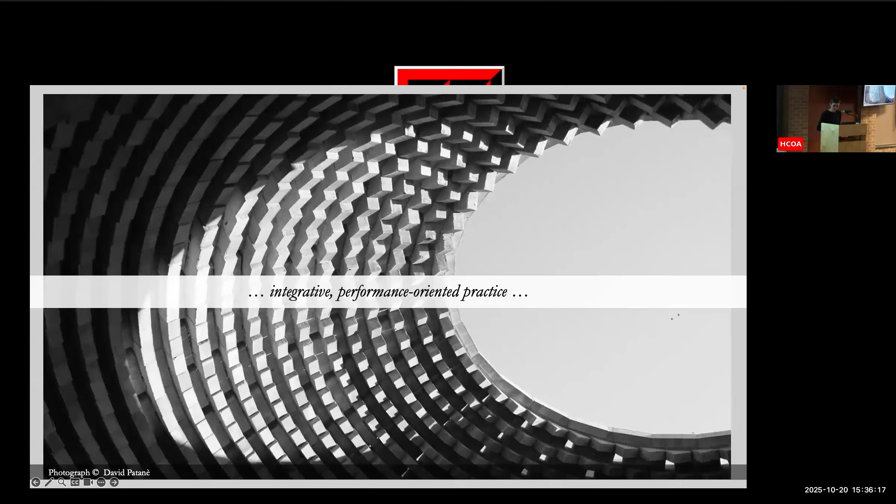So before I talk about my current research, I'd like to provide a little bit of context, say a couple of words about my earlier work and just my interest in general. So as you just heard, my creative work as part of a small architectural studio based in Sicily, Italy, was really strongly shaped by my experience as a student at the Architectural Association in London. Aion, my studio, embraced a performance-oriented approach to design, and we really treated natural dynamics as both inspiration and a key driver of decision-making in architectural design. I co-directed the practice with Andrea Di Stefano until 2013, when I moved to the US to pursue a Doctor of Design degree at the GSD.

So to give you a sense of what I was engaged in before moving to the US, I'll just very briefly mention a couple of projects. I Ramarri was a project for 5 single-family houses located on the coast of Sicily. In Italian, ramarro refers to the European green lizard. In this project, we focused on integrating the architecture with the natural landscape, and the site for this project overlooks a vast agrarian terrain protected for its environmental value, and it's also framed by the mountains on one side and the Mediterranean Sea, so it was a spectacular site.

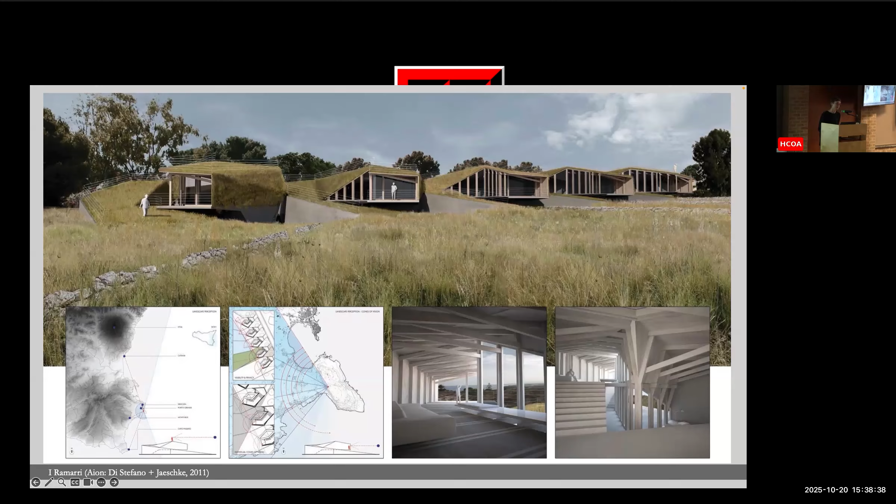In the project, we sought to give each of these houses the best possible view, while at the same time minimizing its visibility from around and also maximizing the vegetated surfaces. So the Mediterranean maquis, which is really like the chaparral, sustained by collected rainwater, was intended to envelop the dwellings with local shrubs and aromatic plants. The green roofs were designed to protect the houses and accommodate outdoor activities, further extending the habitat. The project, unfortunately, remained unbuilt due to a change in land use regulations. That's probably where my interest in building regulations started.

Lost Highway, another design that remained on paper, this time due to the global financial crisis of 2008, another reason for my doctoral research, was a project for a private house, again in Sicily. The building was conceived as a very simple rectangular volume, really a bundle of beams, with an interior courtyard meant to interconnect two independent and flexible living spaces.

So it provided us with an opportunity to explore an integrative process that took advantage of the redundancy that is inherent in glulam and any kind of heavy timber construction. The wall thickness was determined, of course, by thermal requirements, which then in turn generated structural redundancy. And so this allowed us to experiment with integrating other factors such as visibility, illumination, natural ventilation by really subtracting rather than adding parts or layers to the building.

We experimented with a randomly generated pattern of openings controlled only really by the desired degree of porosity. And this quite heavily rule-based design approach was in this case combined with a chance-driven process, a combination that I think produced some interesting unexpected results and a distinctive aesthetic.

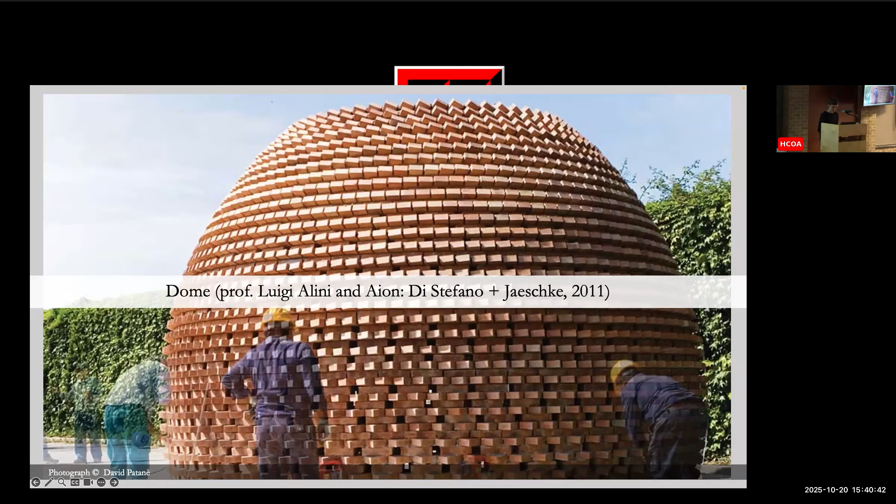And so in this project here, you see this compass. We took this traditional manually operated tool that is used for laying bricks, and we gave it another level of sophistication. We made the arm not only extendable, but we also added a mobile brick holder that let each brick rotate around its axis. And so this simple modification gave the tool enough flexibility to actually produce a range of dome geometries and surface effects. And that brought the method very close to what's possible with digital tools today.

What's exciting is that this also opened up the potential for countless domes and dome variations to be actually built using the same device that could be reused. And the compass also helped us work within local economic and technological constraints, since, of course, acquiring a robot at that time and in Sicily was neither feasible nor really desirable. And so without losing the richness and complexity associated with digital design, we were able to achieve similar effects.

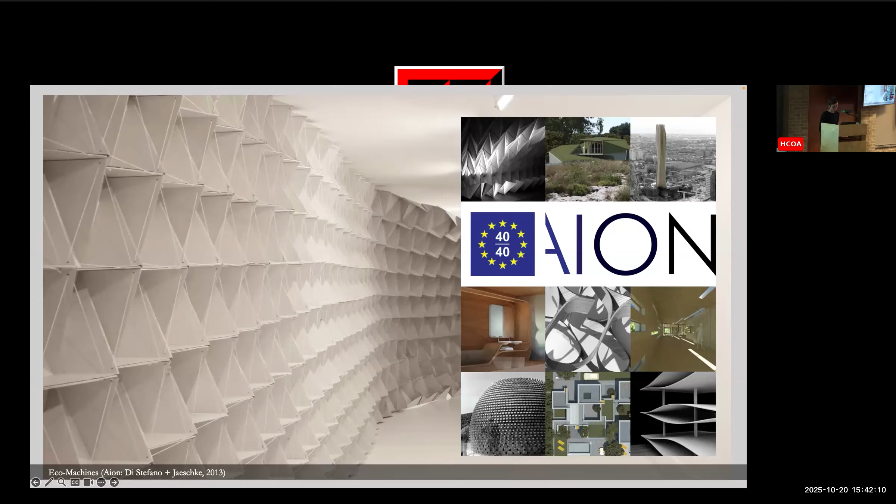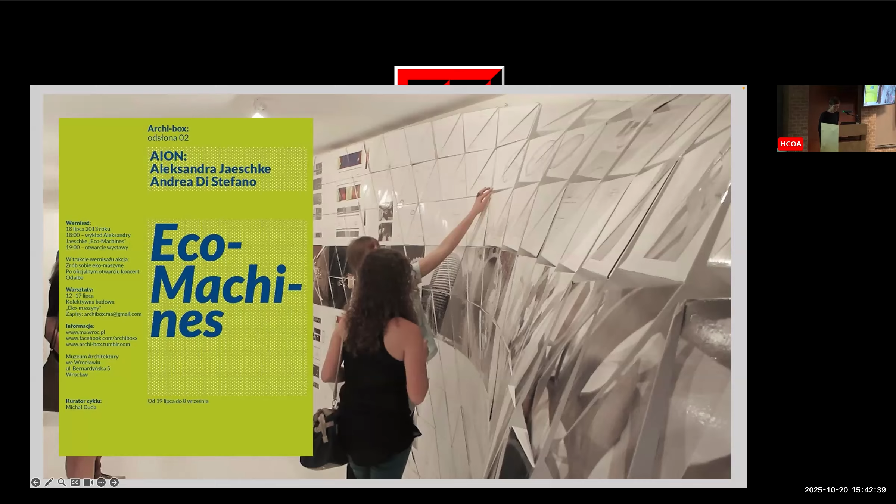In 2011, in recognition of the work that we developed, my partner and I received this award from the European Union. And then it was really an exciting time, although admittedly really stressful also because of all these legal and economic challenges, but in 2013, we had the privilege of presenting the solo exhibition in Wrocław, which is actually one of the very few museums of architecture in the world. And shortly afterwards, I moved to the United States to really reflect on those years and devote myself to research.

So my interest in sustainability originated really in that early creative work, even though the term itself was not really part of my vocabulary at that time. Despite my commitment to the natural environment, I always found myself struggling with how narrowly sustainability was defined within architecture, gradually really recognizing its failure to convey the true hierarchies of importance among our spatial, energetic, and material choices and impacts. And this realization triggered my interest in systems theory, particularly its applications in ecological studies. And over time, I began to really embrace ecology as a framework for architectural discourse.

And so, as my understanding of our place within the biosphere became more and more holistic, I also came to see the need to pay equal attention to what we do and how we think about it, to our actions, but also to the mindsets from which they arise. And so up to now, my work has mainly focused on questioning the validity of the frameworks we use in architecture and on emphasizing the importance of drawing from other domains of knowledge, of expanding our systems boundaries, and rethinking the mindsets that tend to favor certain modes of inquiry over others. At the same time, I've been constantly deepening my understanding of and appreciation for the relationships that connect humans and plants.

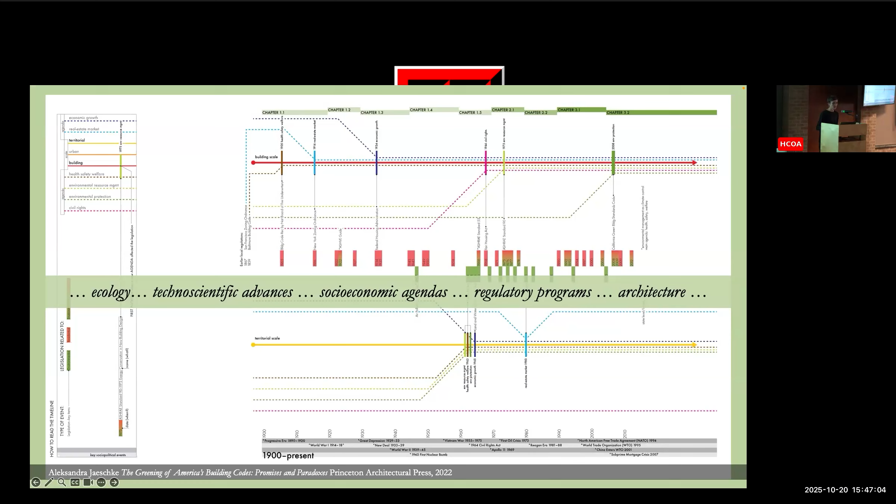healthy, and sustainable. And so what I found was that the cultural, socioeconomic, and political forces that shaped those early building codes and financial instruments actually still influence today's regulations and incentives. In other words, those same forces continue to determine how we build, how we measure environmental impact, and ultimately how we define sustainability itself today.

The book, based on my dissertation and entitled The Greening of America's Building Codes, was published in '22. And in the book, I, of course, examined the origins of the narrowly defined frameworks and mindsets from which all these ideas, sustainability, green building standards emerge. But at the same time, the book tries to reflect on, through a series of interviews, how we might expand the boundaries of our practice to actually try to catalyze some meaningful change.

And so I highlight a range of successful, what I call pre-design efforts, including things like the development of new model building codes and standards, technologies and products, and software tools, but also financial mechanisms. And among others, I spoke with the American architect Martin Hammer about his work on the development of model building codes for traditional construction systems, such as straw bale, and more on that later. And I also spoke with the German geographer Michael Bruse, who developed the environmental simulation software called ENVI-met, which many of you probably know and use today.

So my struggle with the narrowly defined term sustainability also had to do with how we define the spatial temporal system boundaries. So think about this. A relative increase in energy efficiency, for example, might turn out completely insignificant if one considers other scales of investigation. Yet we often draw the boundaries of our, that is, architectural systems too tightly to be able to even see it.

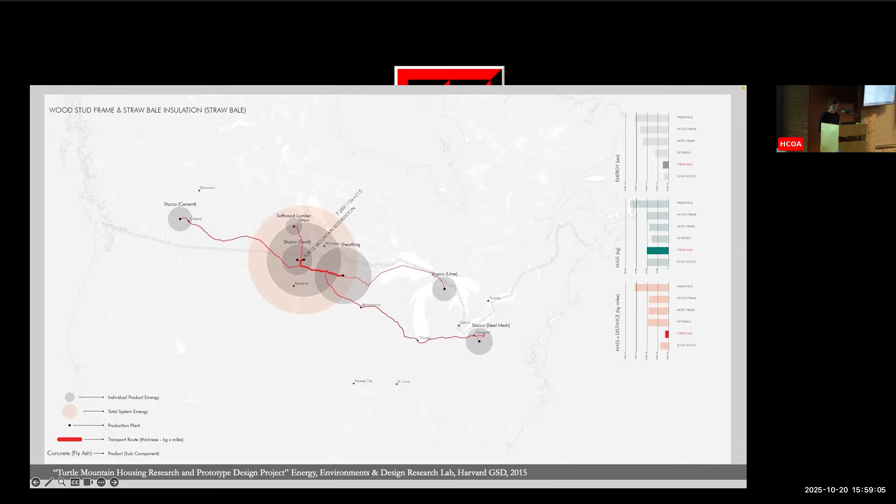We rarely do that in our field. And we often see negative carbon emissions reported for these kinds of materials since they absorb carbon as they grow. In other words, we get credit for work we humans did not actually do. But more on that in a moment.

But as our investigations over the last decades, years, into the environmental impact of buildings have expanded, or we could even say shifted, from an early focus on the operational stage to a full cradle to grave perspective, and now with even more focus on the raw material supply chain and then the end of life of materials, of course, as well, which is not at the moment the topic of my talk today, we've started to look at a much bigger picture. And I like to use the framework of the 9 planetary boundaries to think about this broad and at times rather bleak picture.

This framework was developed and is continuously being updated by the Stockholm Resilience Center. It identifies 9 key planetary systems that together indicate the overall health of our planet. By the way, there's a phenomenal documentary about this. I really recommend it. Its title is Breaking Boundaries.

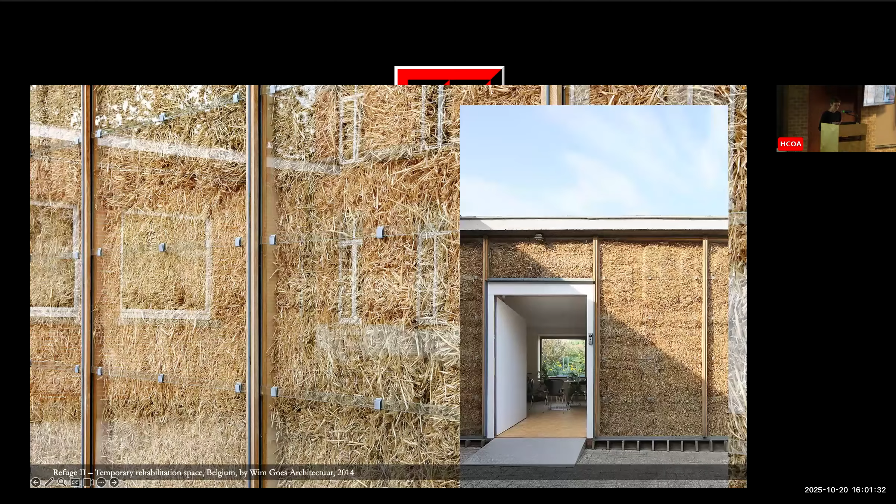So all these visual tools and methods we use help us talk about environmental impact, and we can definitely do even more on that, but I think we've been already paying a lot of attention to it and using these tools in quite successful ways.

But at the same time, buildings themselves convey environmental messages in very different ways. And there's a long history of environmentally conscious design that not only tries to reduce a building's impact, but also uses architecture as a form of communication, as a way to express environmental values. And we could say, in other words, that buildings also function as environmental media.

But whether these two objectives, the actual performance and the message being communicated, truly align, I think is often debatable. Sometimes, and most of the time really unintentionally, architects project messages that are only true in relation to maybe more harmful alternatives or within narrowly defined system boundaries. And so these messages may be based on practices that were considered environmentally friendly in a different context or at a different time. But once broadcast, these messages tend to perpetuate themselves.

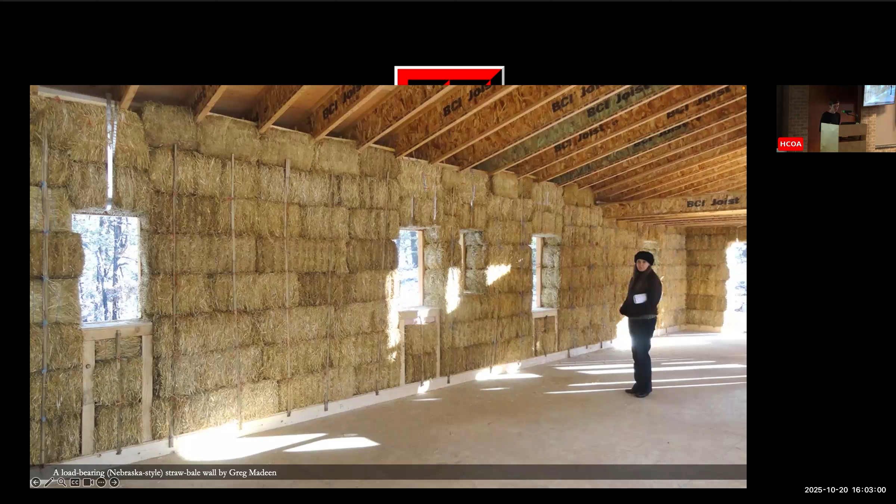So let's take a closer look at straw, since it's often held up as an example of healthy and environmentally responsible construction, and I still think rightly so for many, many reasons. In the United States, the practice of building with straw began to take shape in the late 19th and early 20th century, especially in Nebraska, where settlers in the Sandhills used straw to build their homes. By the way, the most famous example, I think, is the Pilgrim Holiness Church in Nebraska that is almost a century old.

Now, my own engagement with straw began when I was a doctoral student, so that's a while ago, at the Harvard Graduate School of Design, where I led a project to help an indigenous community in North Dakota develop a new housing prototype. So as part of the preliminary research, we evaluated 6 different construction assemblies and ultimately chose non-load-bearing straw bale construction.

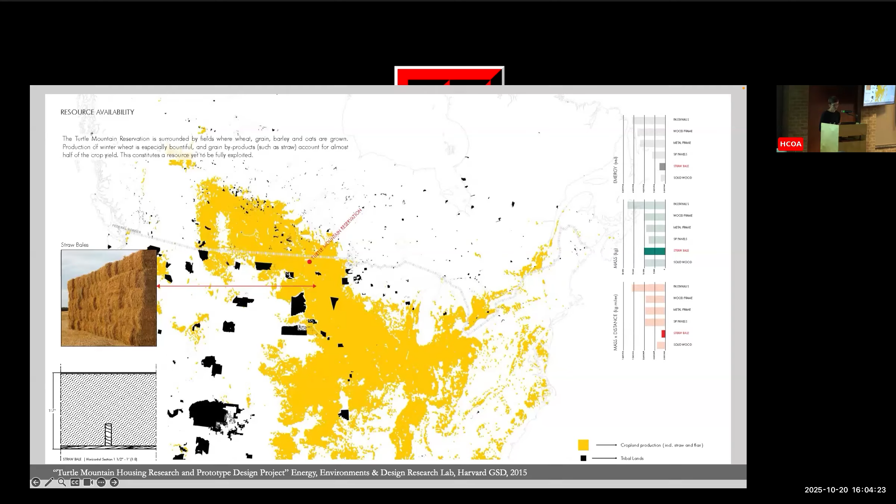Now, despite its many advantages, low embodied energy, local availability, and the community's prior experience with this construction technique, implementation was challenging, and it was hindered by the lack of logistical infrastructure, but really mainly by cultural misconceptions about straw as a building material. So let me give you a really quick overview of this project.

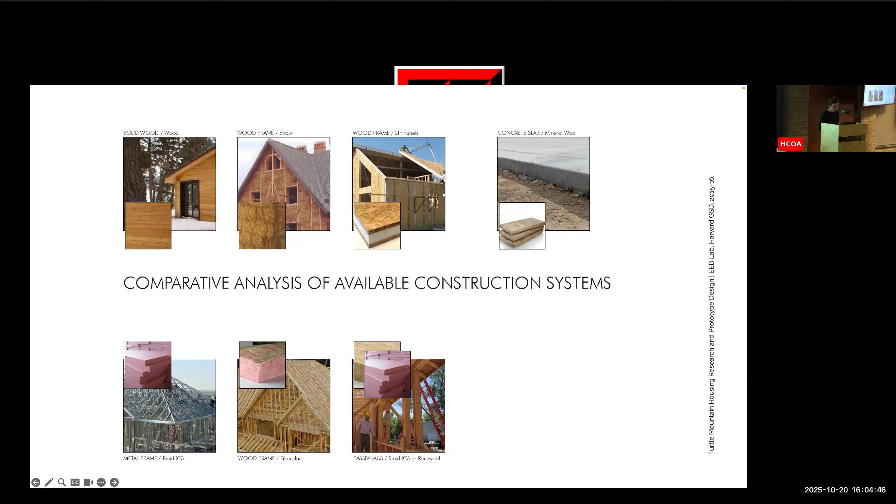So to propose a solution, we began by analyzing 6 common wall systems and 1 typical foundation, since there isn't really that much to choose from, so we could compare their performance and environmental impact. We modeled and analyzed each of these systems to see how they performed in 3 key areas.

Overall mass, which of course matters when assessing the impact of transportation; emergy, a more inclusive way of thinking about embodied energy that was developed for ecosystem accounting in systems-based ecology by Howard Odum again. And we also looked at heating loads to understand the energy required during the operational phase.

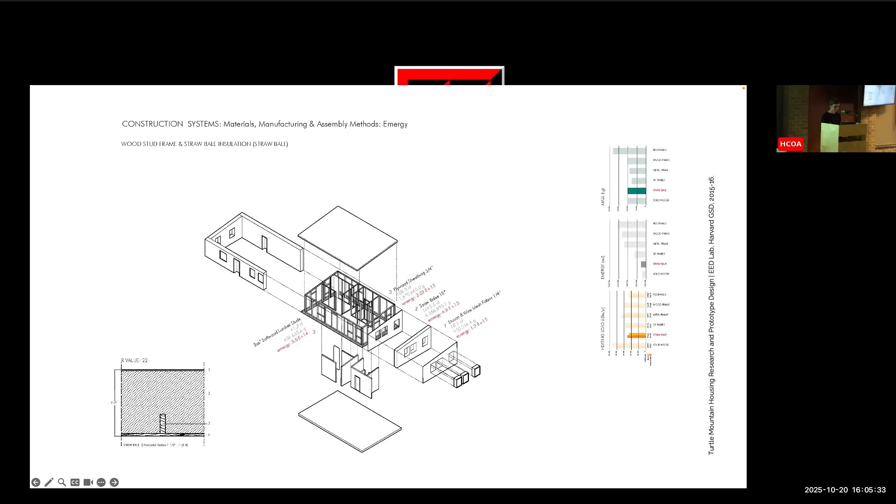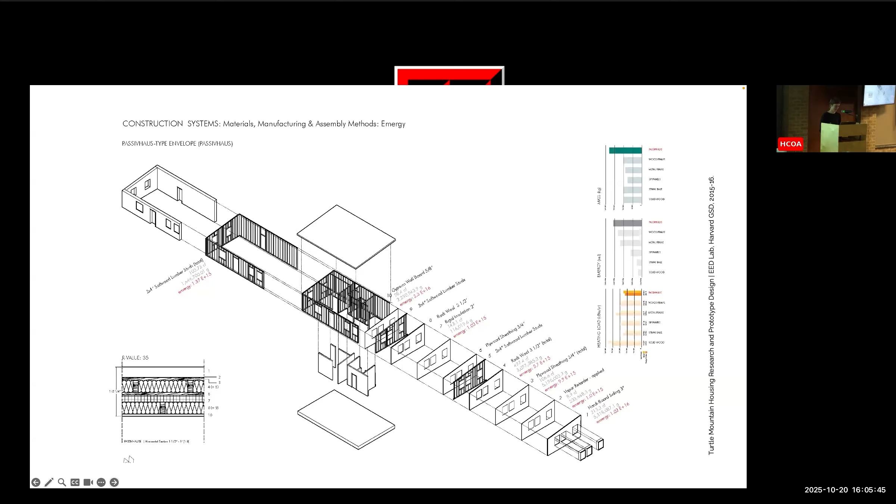So here you see an exploded diagram of a solid wood system and the diagrams of its scores. And going through the different materials, this is a straw bale, non-load bearing straw bale construction, SIP panels, light gauge steel frame with rigid insulation, wood frame with batt insulation, and then passive house. Of course, even just visually, we see how things start to expand.

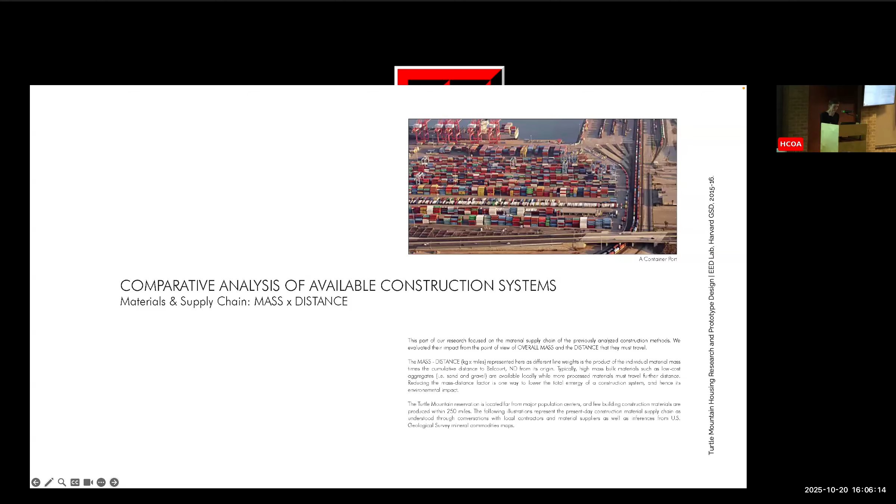We then looked at the supply chain and evaluated how the mass of each material relates to a distance it needs to travel to actually reach the site. And this helped us assess the embodied impact of transportation, not only in terms of energy use and carbon emissions, but also just simply to acknowledge, even if not being able to quantify it, the hard to measure effects on road infrastructure and ultimately on land systems.

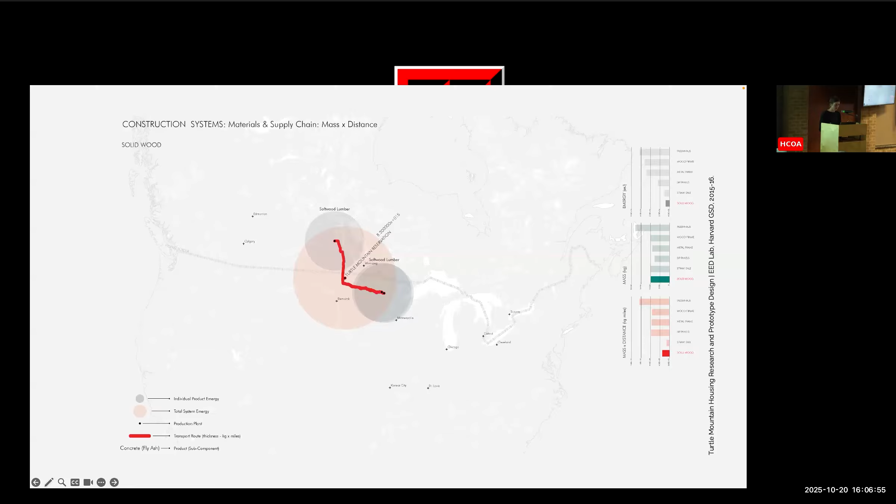So in these map-based diagrams, you can see each system analyzed in terms of the distance its materials would need to travel from the first supplier that we were able to find. And the thickness of each line represents the mass distance impact, and the gray circles show the embodied energy for each material, and the orange one shows the cumulative impact for the entire system. So again, it's comparing the same systems, solid wood, straw bale construction, SIP panels, light gauge steel frame with rigid insulation, wood frame with batt insulation, and passive house.

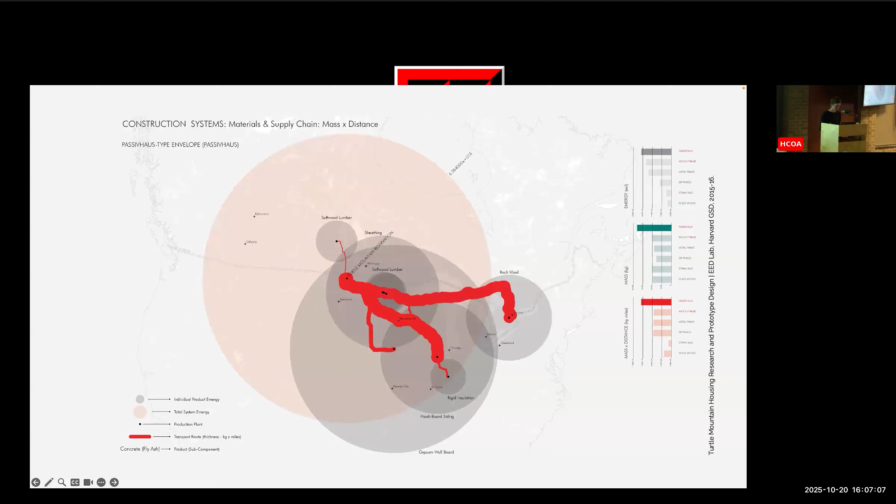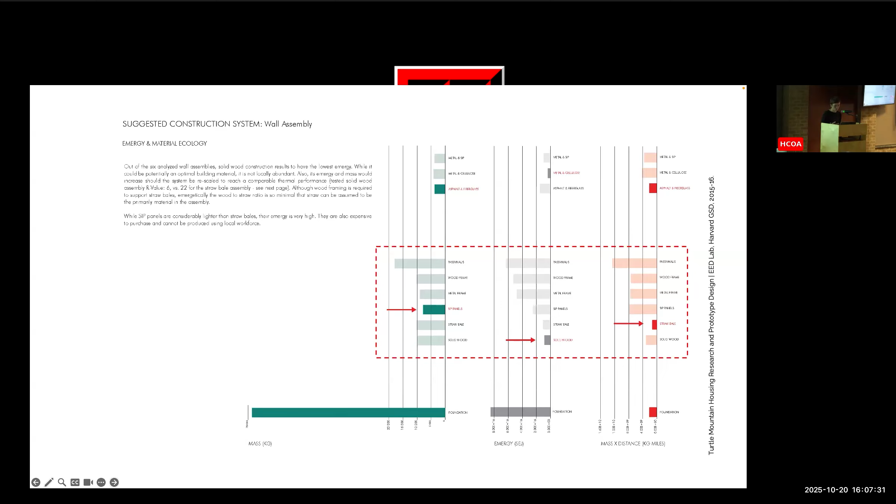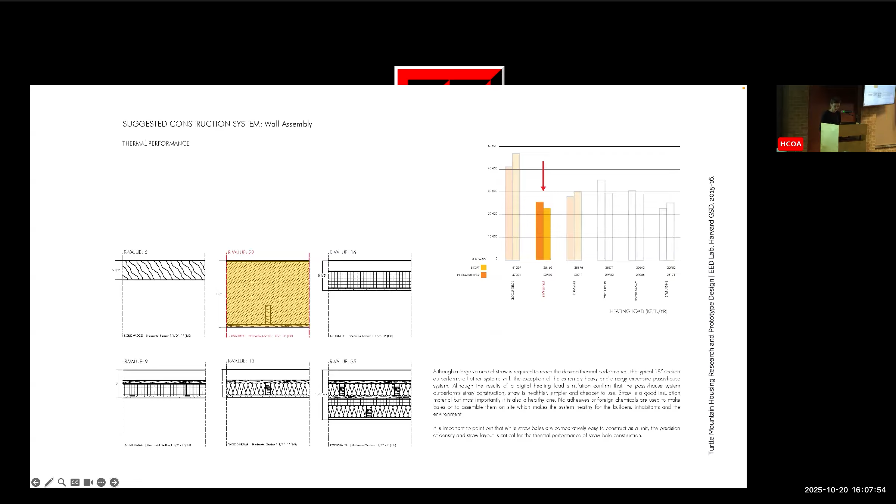Now, these 2 types of analysis helped us narrow down the options. There wasn't a simple, clear winner, but we focused on 3 systems for a moment. It was the SIP panels for the lightness, solid wood for the low energy, and straw bale for the really local availability, proximity to the site, which of course affects the transportation. And even though the passive house system offers, with no surprise here, clear advantages when it comes to operational stage, among the three shortlisted options, straw bale construction really ultimately outperformed both solid wood and SIP panels, considering all these issues. But the decision wasn't really based on performance alone.

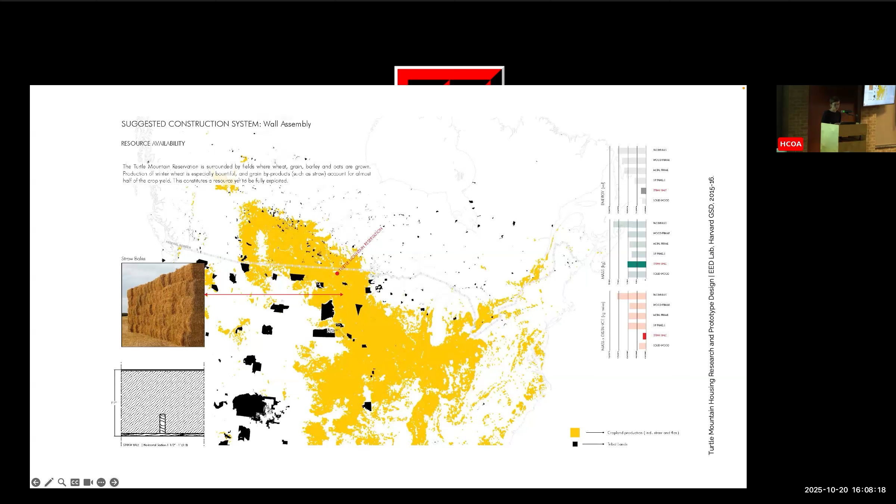The site and the community are located in an area where straw is abundant. And so the yellow areas on the map here, of course, indicate the crop producing regions. And some of these are tribal lands, the ones in black. And that makes this really important because it creates an opportunity for intertribal collaborations, we could say. And also importantly, we discovered that the community had some previous experience in straw bale construction.

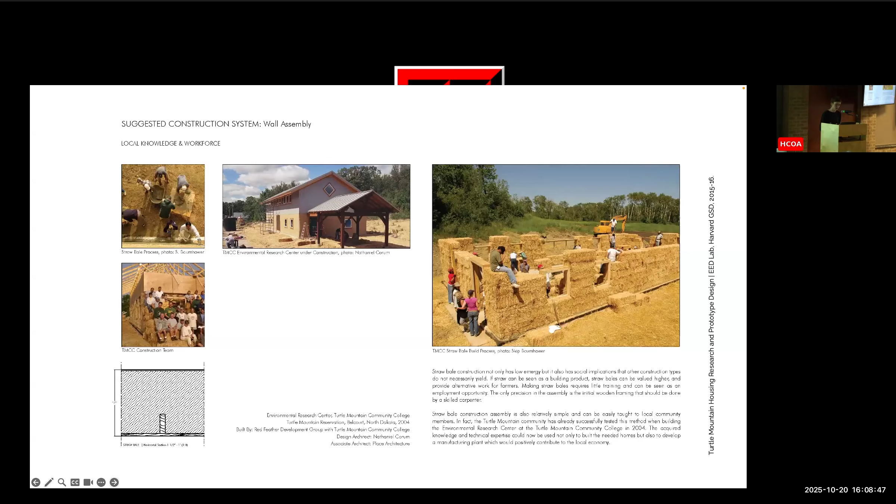Nat Corum, who works a lot with indigenous communities, had organized a straw bale workshop there. And so many community members we spoke to had taken part in it and still retained that knowledge. So we felt that this was also a very important aspect to build on.

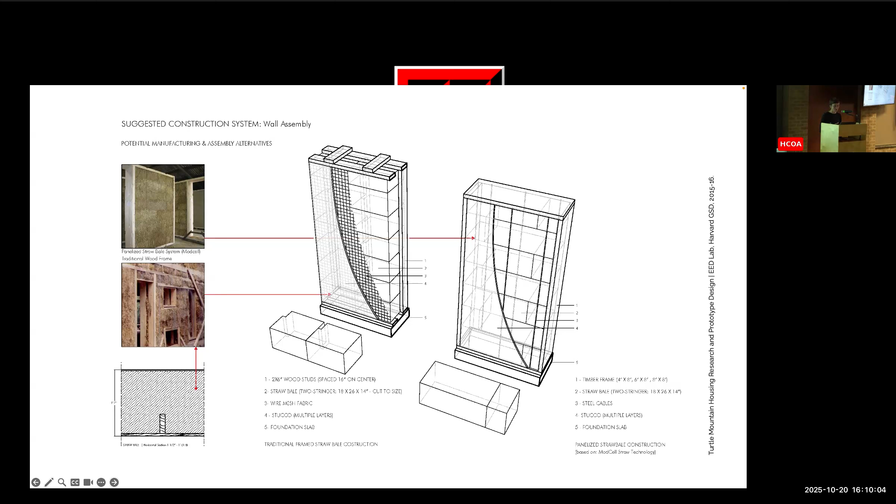Unfortunately, as I said, the project was eventually archived by the community's new leadership, and the reasons were many. But cultural preconceptions really, I think, were the key one. Simply speaking, straw in a farming context is still very often seen as a poor man's material. I later explored some of these issues in my book, reflecting on the role that legal frameworks, industry standards, and building codes play in shaping how we value or devalue certain construction systems.

As I mentioned, in part this was something that I explored through those interviews, and it was really interesting for me to see how this construction, which largely disappeared with the rise of industrial materials, like most of those traditional systems, actually reemerged in the late 80s, partly in response to California's efforts to curb the burning of rice stalks. So it was a pollution issue. It wasn't really related to construction at that time. And so around that time, straw bale construction was actually rediscovered as a natural low impact alternative and a way to use that straw and not burn it. And it began to attract renewed interest as a healthy building material.

And the advocates like Martin Hammer, whom I interviewed, have since worked to integrate straw bale construction into building codes, actually moving it from those legislations related to air pollution control, in order to help to legitimize its use in contemporary architecture. And so now in many cities and states, we actually have a straw bale appendix, which we didn't before that.

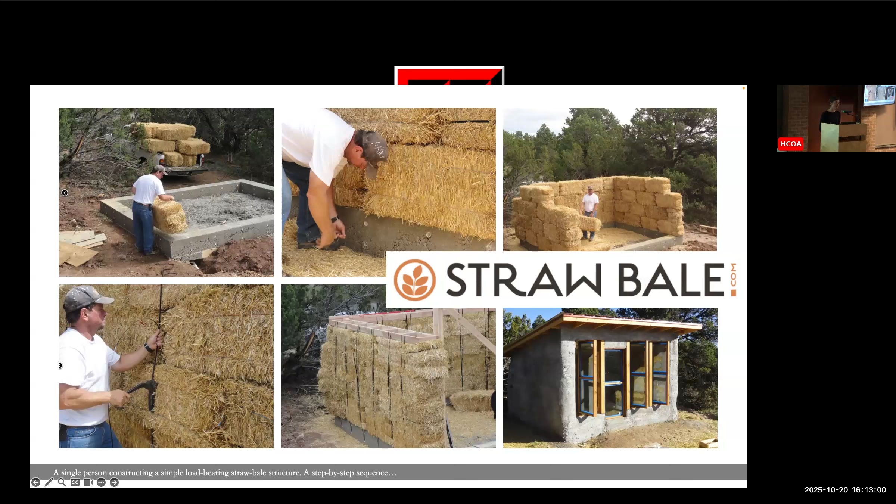Many participants also spoke about the health and general well-being benefits, the tactile simplicity of the construction process, and the satisfaction that comes from working so directly with an organic material. Many of them talked about it. They also emphasized the sense of community that comes from the collaborative nature of straw bale construction, especially its owner-built projects where friends and family often actually take part in the building process.

So also last year, my students at UT had the opportunity to build with straw, and the material came from a nearby farm. It actually wasn't that far from Austin, where straw is a byproduct of grain production, which here in Texas means wheat straw, which is the most common type. It could also be rice, rye, or oats. The bales that we used were very clean, clean enough to handle with bare hands and light enough to move around without any kind of heavy machinery, which is incredible.

The urban farm that hosted our project planned to repurpose the leftover straw as mulch for their crops, closing the loop in a simple but meaningful way. The wall we built was finished with a plaster sourced from a nearby riverbank, which we applied by hand. The process itself, breathing in the scent of straw, feeling the texture of the clay, created for students a deep sense of immersion in both the material and the environment. It became an experience of attunement, a moment of realizing how a construction material can foster a more intimate relationship with the land.

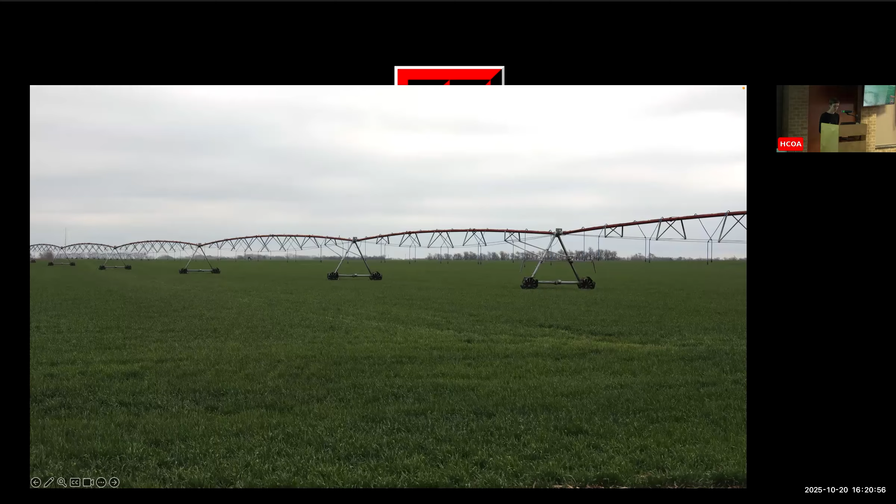Monoculture fields lack the variety, the richness, and the seasonal rhythms that foster a sense of belonging. They don't nurture the kind of knowledge that comes from working closely with many different species, knowledge that is tactile, intuitive, and deeply ecological. They do not encourage the kind of intimate place-based practices that sustain both ecosystems and cultures over generations.

In contrast, polycultures, like those envisioned by the Land Institute, but also like the coffee chacras I spoke about before, offer the potential to restore not just ecological health, but also our human connection to the land. They create opportunities for collective knowledge sharing, from seed saving traditions to soil restoration practices, helping ensure that agricultural wisdom is passed down through generations. In this way, polycultures don't just support biodiversity in the fields, they also sustain the social and cultural diversity that makes agricultural landscapes feel inhabited, meaningful, alive, and cultural.

A monocrop plantation, by comparison, such as a wheat field from which most straw is derived, can never make one feel native to the land. It's too uniform, too rigid, too indifferent to the nuances of place. And unfortunately, that's the unwanted part of the story of straw bale construction. It's the same story we are now witnessing with timber, where monocrop tree plantations are so often portrayed as forests.

And so even though a landscape like the one you see in this slide might evoke positive associations, that of abundance, harvest, bread sharing, all these cross-cultural symbols of plenty, it also points to something darker. It indexes processes of overexploitation, soil depletion, water overextraction, pollution, the disruption of nitrogen cycles, and quite simply, the continuous expansion of land under cultivation.